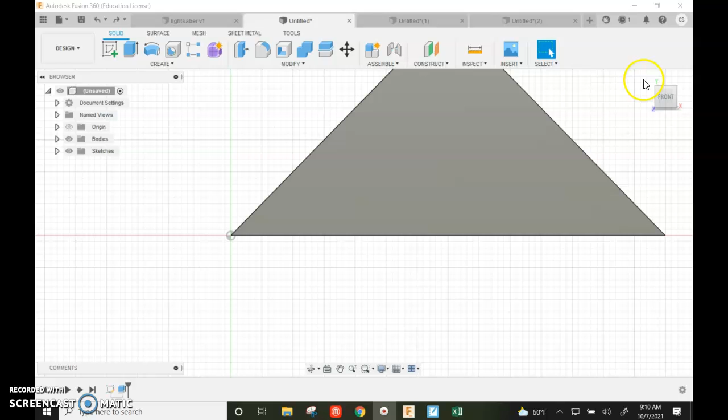Okay guys, starting a screencast again. A couple kids rolling their eyes at me. I think Edith is kind of mocking me here.

I'm going to put a brick pattern onto this. All right, so I've just made a brick. I'm not worried at all about sizes, I'm just arbitrarily choosing sizes.

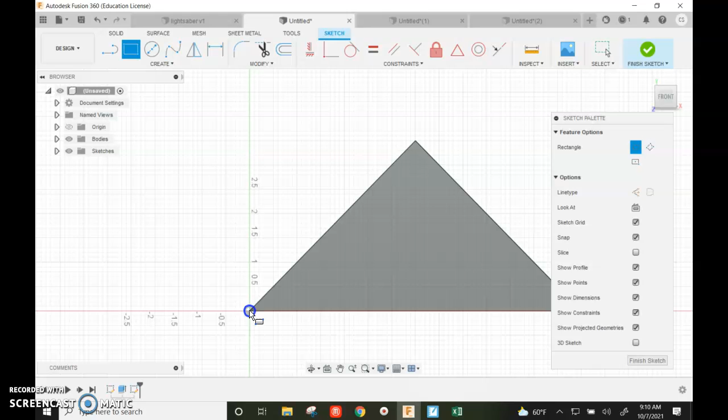I'm going to have to make two rectangles. I'll start down here, go down to the corner, and zoom in. I'm going to make it two cubes high by 6 wide, each one being 1/10 of an inch. I'll click that, and click OK.

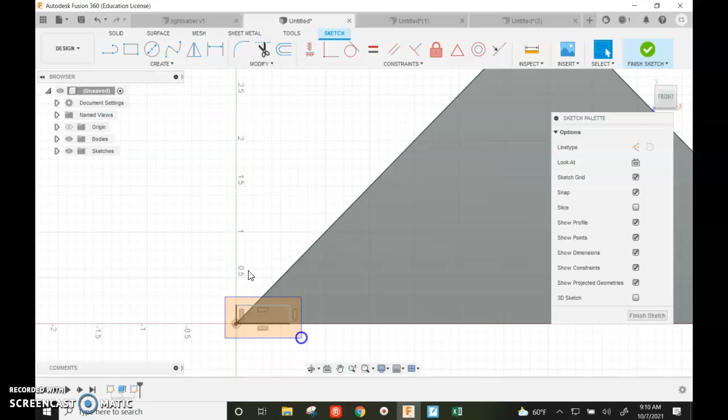I'm now going to try to copy and paste what I just made. So I'm going to try to drag over that rectangle, hit Control C and then Control V. Of course it works every time.

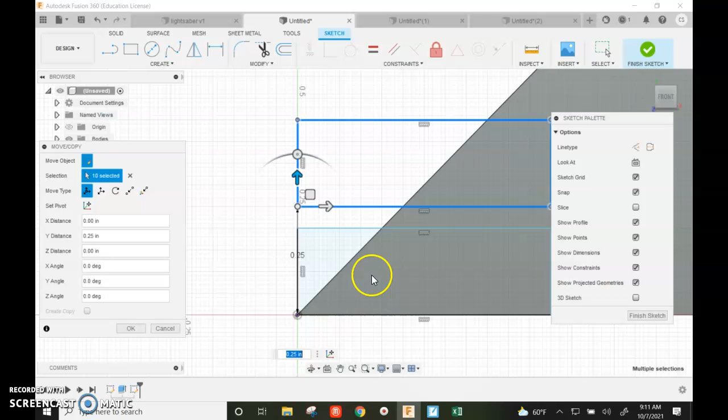I'm now going to drag it up a little bit, leave one block between it, and then shift it to the left so that it is halfway across. Okay, this is how bricks work - they're offset by 180 degrees in phase, so they're going to have a separation. I'm going to go ahead and hit OK.

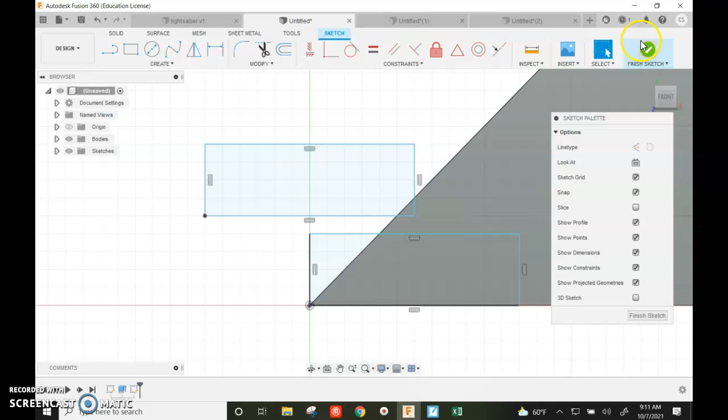Now I'm going to finish my sketch, and then extrude and pattern those two bricks, and you'll see. I'm going to hit extrude, come down here, click on that one - the whole brick - and this little piece right here. Don't worry, I know I'm off the side here, but I'll shave those off later.

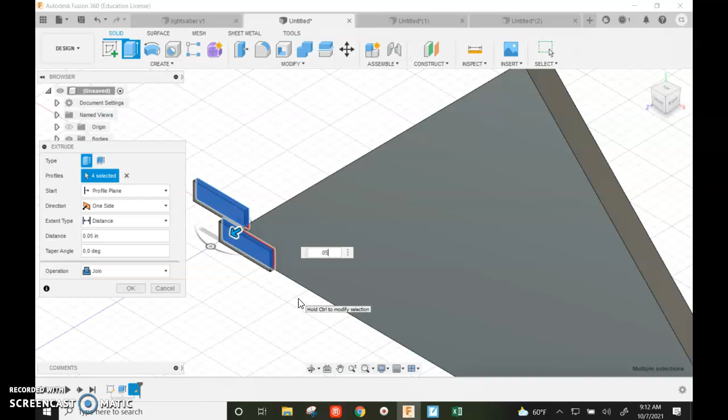I'm just going to extrude them, let's say 0.1. Okay, that looks a little bit more than I'd really like, so I'm going to go 0.07. Oh dear, 0.07. A little smaller, 0.05 - yeah, that looks better to me. Again, that's completely arbitrarily chosen.

Okay, so now you can see what I have. If I roll out there, I have two bricks. Now I'm just going to create a pattern. I'm going to come up to create, create pattern, and this will be a rectangular pattern.

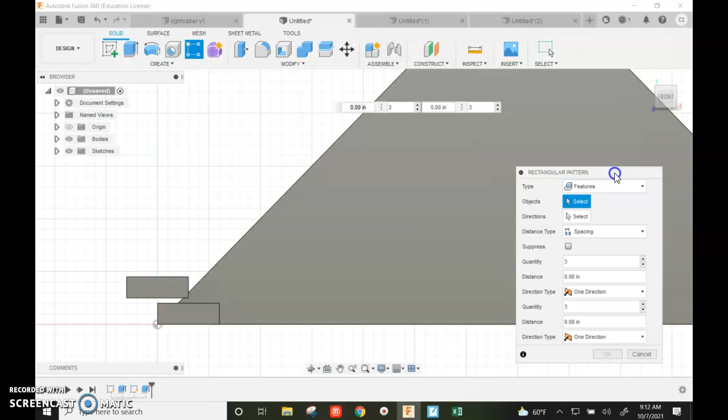It's going to give me a pop-up box here. I want to make sure it says features at the top. I'm going to select my objects - it selects both of those. For the direction, I want to change this to make sure it says spacing, and then for direction I come over here and click on the edge here.

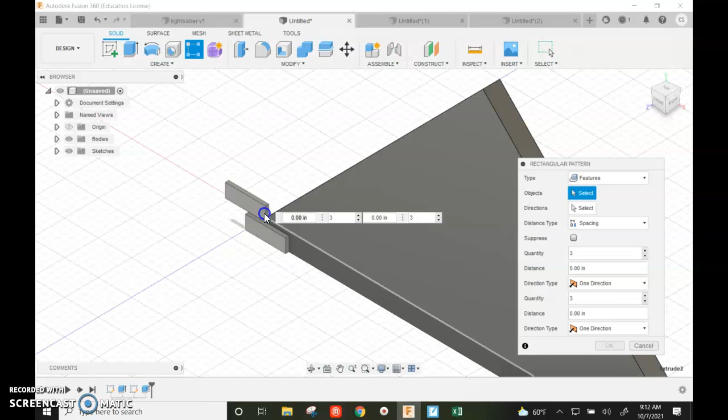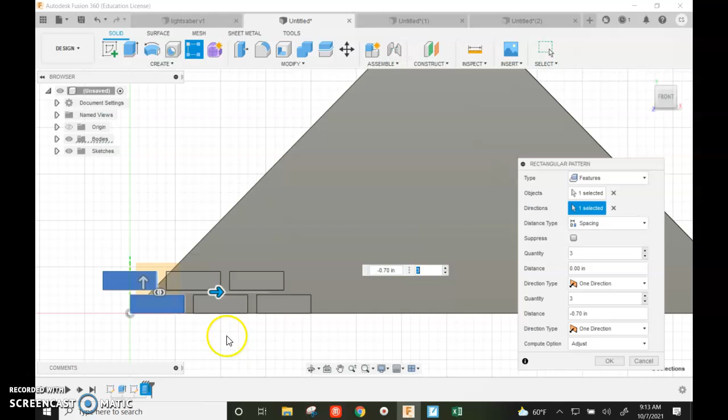Oops, for the objects, I got that now. That'll get pop-up arrows, and I'm going to go ahead and drag those out. Now I'm going to go to front view, and I want to drag these out so that this gap right here matches this gap right there. I'm going to go back a tiny bit - there, this gap and that gap are the same.

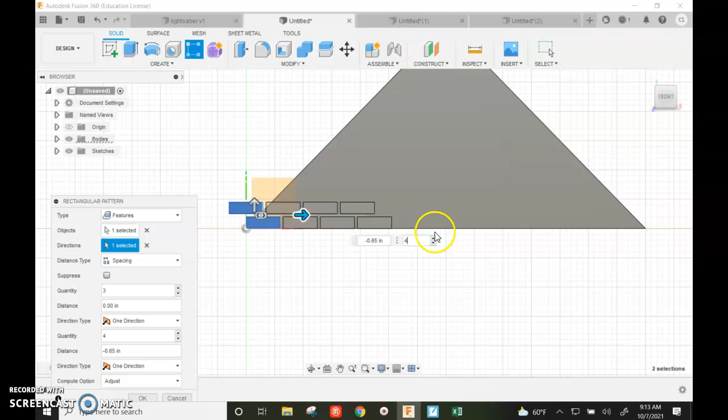So now I'm going to scroll back out, and basically just want to add this. Here where it says 3, I have 3 repetitions. I'm going to change that to 4, 5, 6, 7, 8, 9, running off so I've covered everything. I'm going to hit OK.

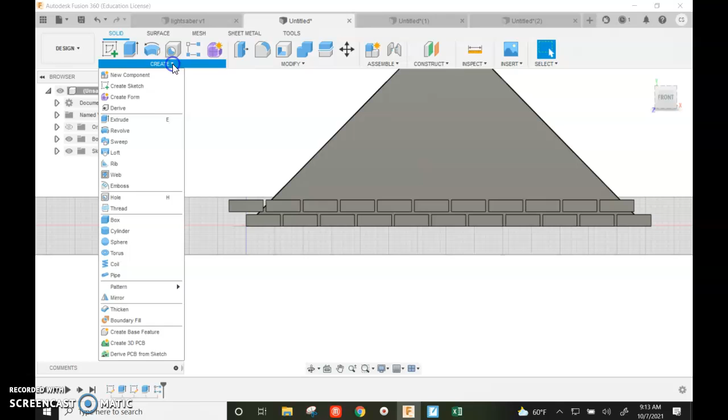Now, if I inspect it real quick, you can see it went that way. Now I'm just going to do it up. So I'm going to come back to create pattern, rectangular pattern, and select - I'm still on features for my objects. Should be able to just drag over everything there. It might get a little bit tough.

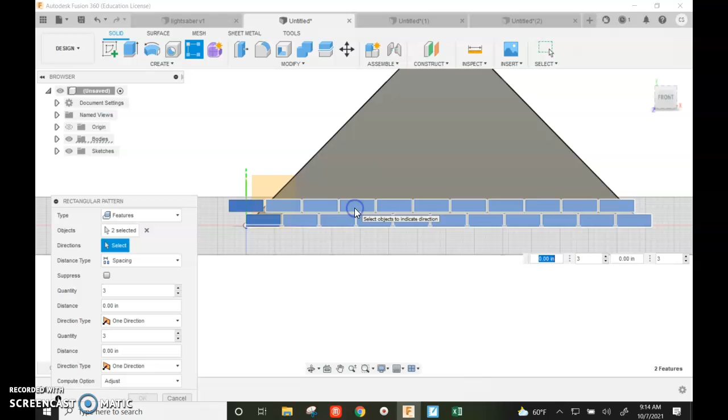This wants to say spacing still. So now I'm going to go to direction, click on it. Directions, I click on an edge, and this will pop up, and then I come in here and drag it up so that the distance between this brick and this brick matches that. That way I have consistent mortar joints. It looks like that's consistent there.

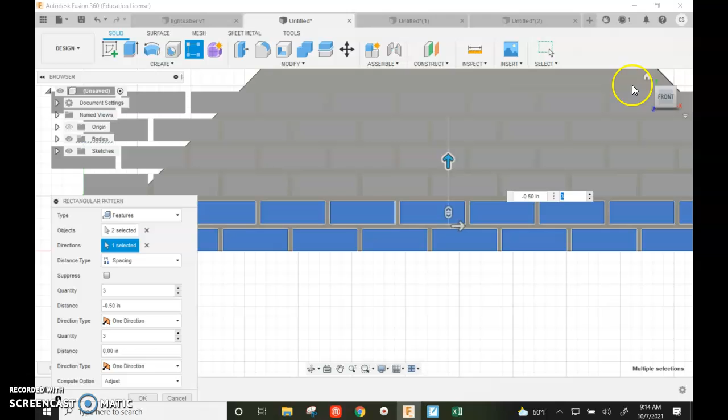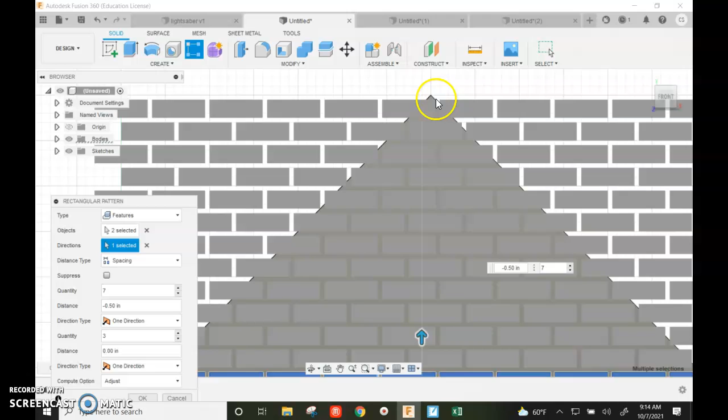I'll back out a little bit - it's a little bit slow running right now, the computer gets tiny bit laggy when this happens. Let's put a 7 in there once and see what happens. Looks like I might have to go 8. Yeah, it looks like there should be a little bit of a brick there on top. Let's go 8. Alright, so that certainly is going to take care of me. So at this point I'm going to go ahead and hit OK.

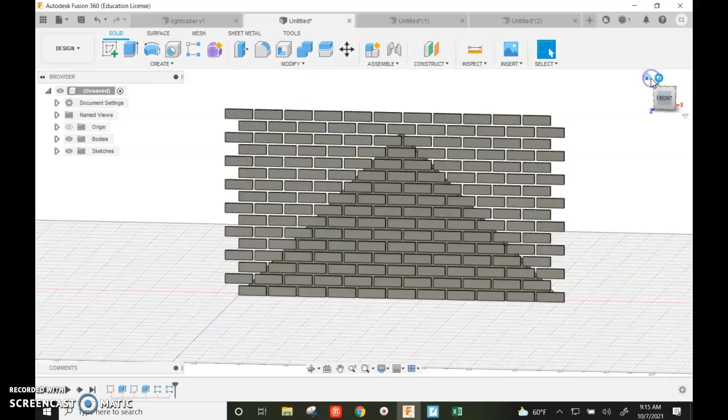Wait, you can see it's computing extrude - it's working a little bit hard. Alright, so I have what I want. Now I just got to get rid of what I don't want.

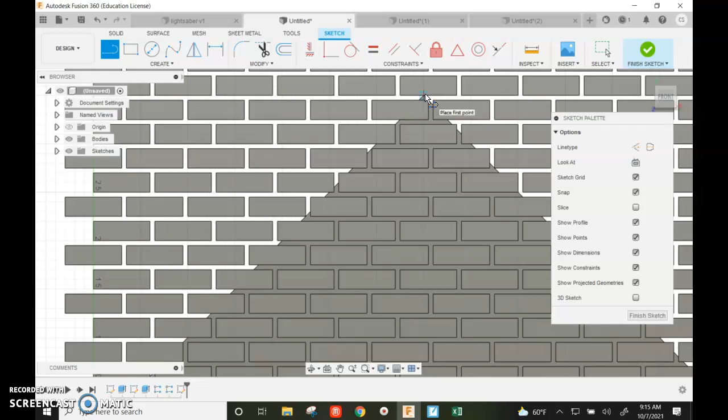So I'm going to sketch. I'm going to choose very carefully the front face of a brick here. Now this will be pretty easy - I'm going to start up here, take a line, and build a little triangle. Go up there to that point, and drag all the way out here, making sure to stay on that.

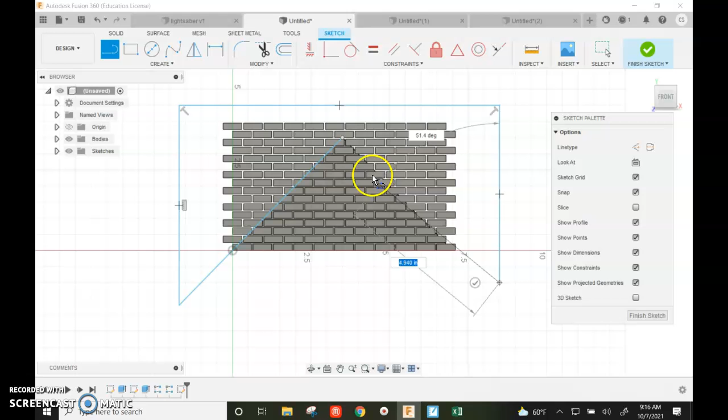Go up to here, come over here, down to here, and up to here. Then I'll finish my sketch, and extrude this shape I just made as a cut to get rid of everything I made that I don't want.

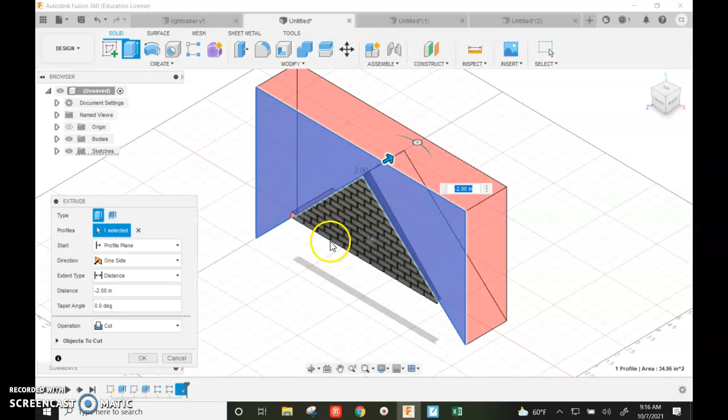And then looks like I got a little piece down there I didn't include. I'll have to do it again real quick. Actually, you can do that.

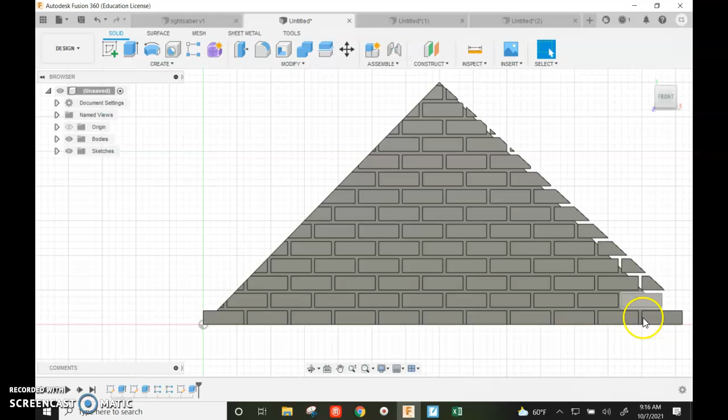Okay, so here I put a brick pattern on here, and I did indeed. Apparently when I made my sketch, I didn't make a real good triangle, but you can certainly see. I'll redo it, but I'll post this one first - I'll go back and make a better line on that one. But you can see I just basically put that on there and went around and cut it back out. I think this is a relatively easy way of doing it.

I'd imagine that you could project and emboss if you wanted to go all the way around. For instance, this is probably not the technique I'd use - I'd probably make a grid and project it onto it, which would allow me a little more flexibility, but frankly that's a little more advanced.